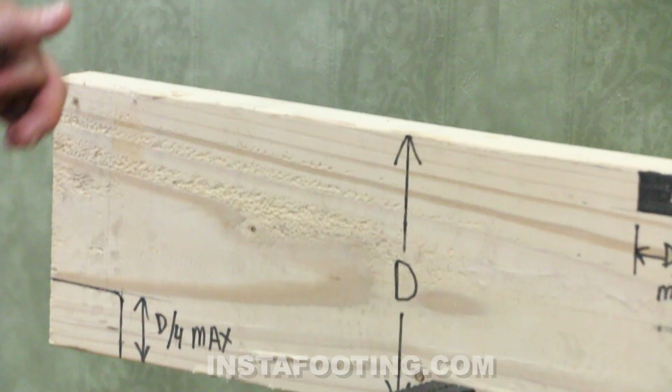Today we're going to talk about drilled or notched or damaged floor joists. We're going to start off by talking about what's allowed for drilling and notching, and then at the end of this video we'll show you a product that we have if your joist is notched or drilled beyond what's allowed. So we'll start off by showing you what's allowed in most building codes.

This here is a 2x8 piece of lumber. What's allowed for drilling and notching depends on the depth of the lumber. So we're not going to talk about a 2x4 piece of lumber because 2x4s aren't allowed to be used as floor joists. And we need to know the true depth. So a 2x6, for example, is not 6 inches deep, it's 5.5 inches deep. A 2x8 is 7.25 inches deep.

2x10 is 9.25 inches deep, and a 2x12 is 11.25 inches deep. So all the notching that you're allowed to do and drilling that you're allowed to do is based on the true depth of the floor joist. As far as end notching goes, you are allowed to notch up to 1/4 of the depth of the joist, and that's sometimes necessary to get it over top of a beam or a wall.

A notch at the top of the joist can be 1/6 of the depth and no more than 1/3 in length of the depth of the joist. In the center third of the joist, you're not allowed to have any notches. That's because the stress is the highest in the center of the joist. So you're not allowed to have any notches.

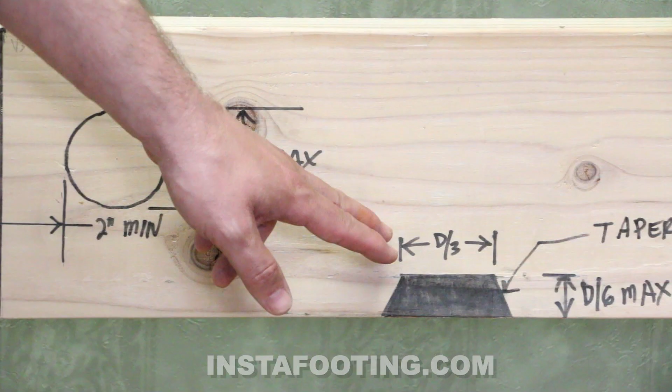A notch on the bottom of the joist can also be the same as the top, 1/6 the depth, and the length cannot be greater than 1/3 of the depth of the joist. If you are notching the bottom of the joist, it's best to taper your notches so you don't split the wood. You can pre-drill holes in the corner to make the corners round and cut a taper. That's a lot less stress on the wood.

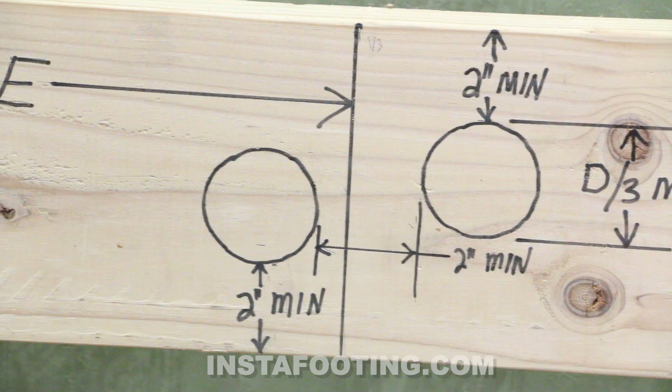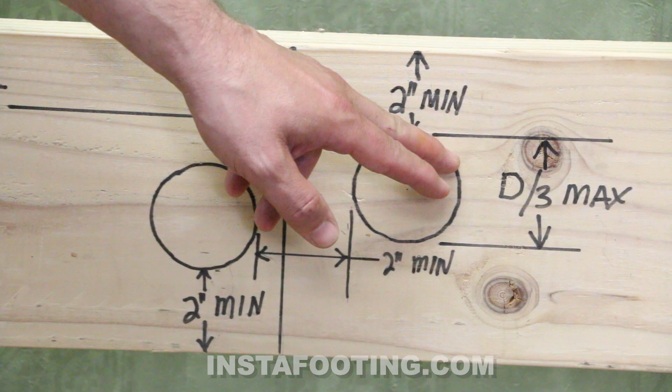Holes are allowed pretty much anywhere except for within 2 inches of the end of the joist. So you can have holes in the center third of the joist, but not notches. Holes must be located no closer than 2 inches from the top, and also no closer than 2 inches from the bottom. The spacing between holes cannot be less than 2 inches. The diameter of the hole cannot be larger than 1/3 of the depth of the joist.

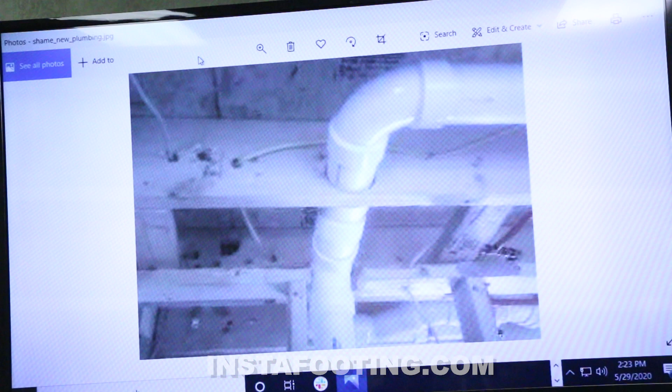So that is what's permitted by code. Now, if you do have notching or drilling greater than that, an engineer can always override the code, but you'd have to let them know because they'll have to do some calculations to see if it's acceptable. Just going to show you a couple examples of pictures of notching. You've probably seen that yourself. Obviously, notching or drilling holes is done for plumbing or ductwork or wiring or some other obstruction.

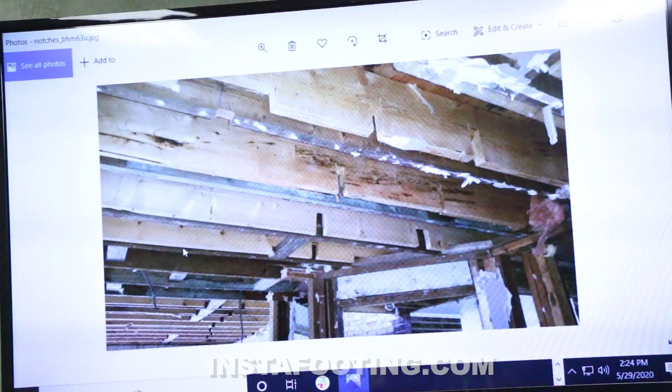This hole doesn't meet code for 2 reasons. First of all, it's less than 2 inches from the bottom of the joist, and second of all, the diameter of the hole appears to be greater than 1/3 of the depth of the joist. This next photograph here, these are notched up fairly bad. Again, the notches are greater than what's allowed by code, greater than 1/6 of the depth of the joist, and some of them may be located within the center third of the joist, and this particular one here is longer than what's allowed.

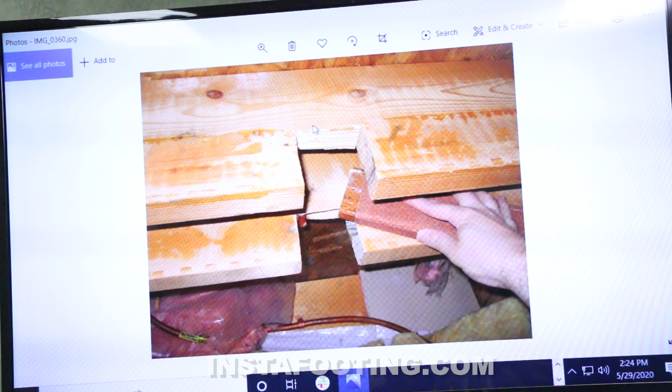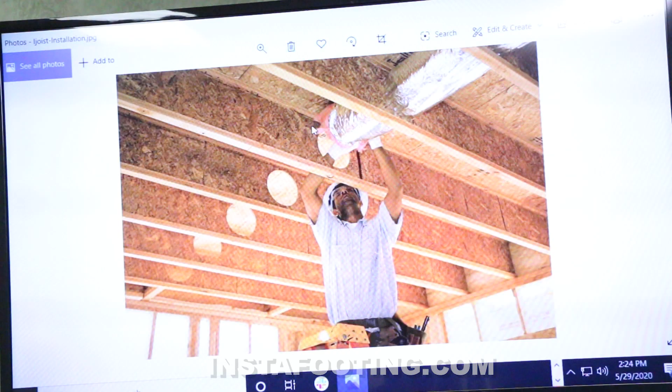And just another picture of a typical notch. And here's one notch that was made for plumbing that someone attempted to repair at the bottom. And I'm sure you've probably seen some joists yourself that have been notched out pretty bad. Here's a hole through a TJI joist that appears to be too large as well.

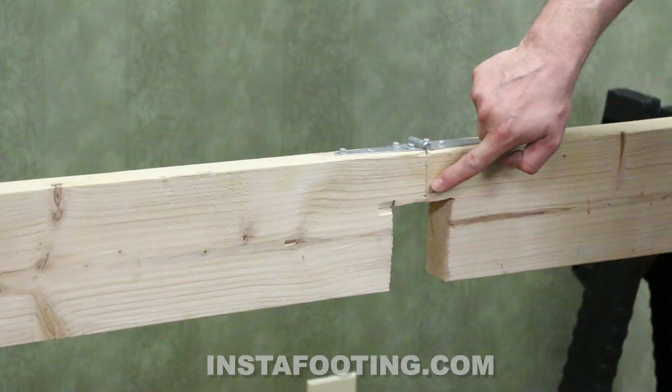Now I want to explain to you the behavior of a floor joist or a beam when it's loaded up with a load. I have a floor joist here that has a notch, and it's also been cut straight through and it's hinged on top. So as you apply a load to any joist, this is what happens. You develop tension in the bottom of the wood and compression at the top of the wood. So as you can see, if you cut out a notch, there's no material left there to absorb that tension, and it'll eventually split open and fail.

Mostly, if you see this in the field, there's really only one way of repairing this situation, and that's what's called a sister. They'll come alongside and they'll sister a floor joist alongside. The problem with that is, there's a few problems. First of all, usually there's plumbing and wiring going through the joist, and removing that plumbing and wiring and rerouting it is very expensive and time consuming and sometimes difficult to do.

Another problem is it's hard to get a sister in place because it's typically very long. You have to fit it over the foundation wall, you have to fit it over the beam, there's stuff in your way, so it's a very difficult thing to do.

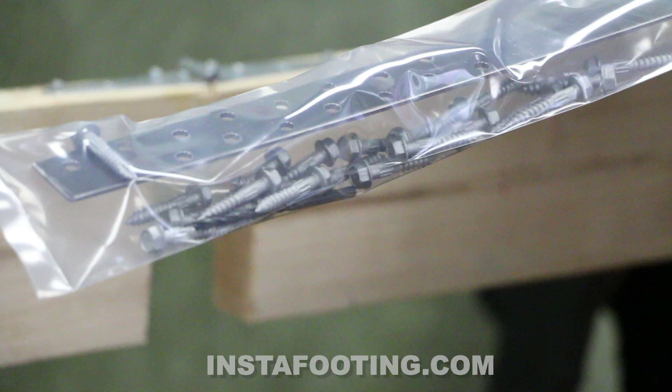We've come up with a product that alleviates that, allows you to leave your pipes and your plumbing in, but also restore the strength of your joist, and I'm going to demonstrate that for you now. What we've come up with, we call the joist repair kit. It's essentially a strap that's been specifically designed to attach to the bottom of the joist and absorb that tension force. It's been designed for the longest span joist that you can have per code under a full design load.

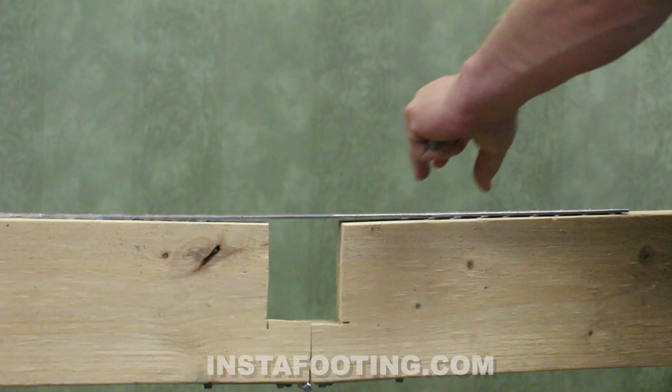The kit comes with the strap with the pre-drilled holes, a drill bit for you to drill pilot holes, all the screws you need, and the nut driver to install the screw. So I'm going to go ahead and install the strap at the bottom of the joist with just a couple of screws because I won't be loading this up fully at this time, just to show you the effectiveness of the strap. Now this strap takes 32 screws, 16 on each side, and that's necessary to restore the full strength of the joist. But for this demonstration, I'm only going to be putting in a couple on each side.

So you want to pre-drill the holes. I have the holes already pre-drilled. And you just want to snug it up. You do not want to split this wood. These are 1/4 inch structural screws. They're very strong. You notice I'm just snugging it up at the end, not overdoing it.

Now this joist is very strong, and that's only with 3 screws. So when you have all the screws in, this would be just as strong as the original joist, even for a 2x12 spanning 17.5 feet. If you stuck around for the rest of this video, I'm just going to finish up with some of the calculations to show how this works.

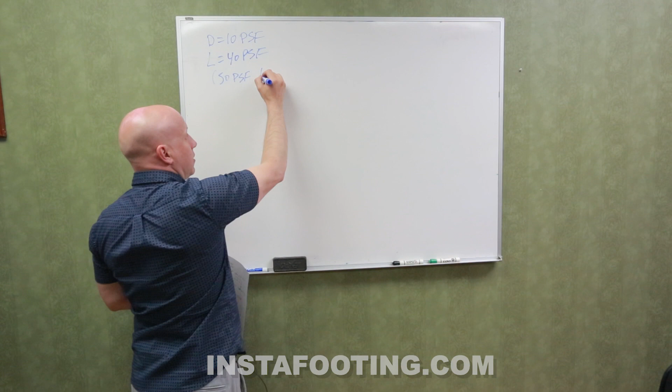So for a typical floor system, we designed for a dead load of 10 pounds per square foot. And if it's a first floor, a live load of 40 pounds per square foot. Typical joists are spaced at 16 inches on center. So we have to account for that. So 10 plus 40 is 50 pounds per square foot. But we have to multiply that by the joist spacing of 1.33 feet, which is 16 inches. So each floor joist would see 66.7 pounds per linear foot.

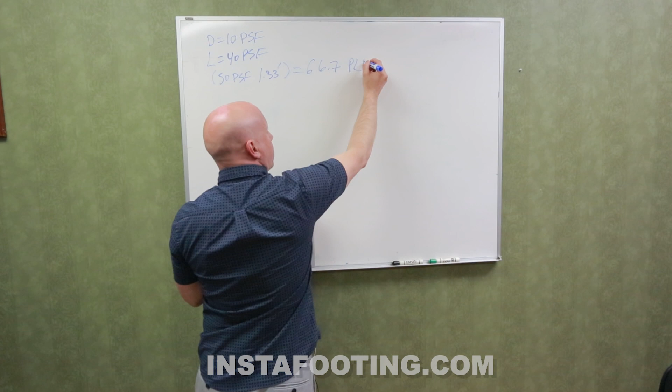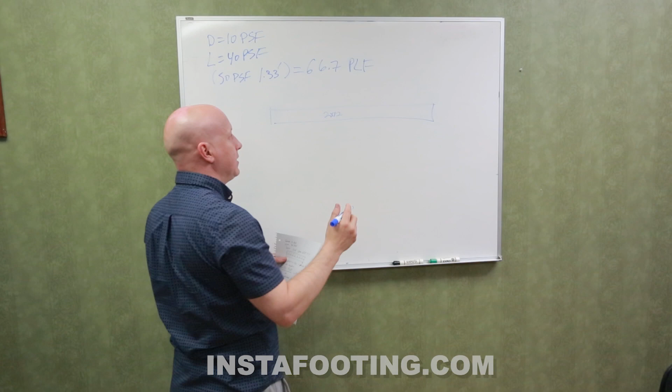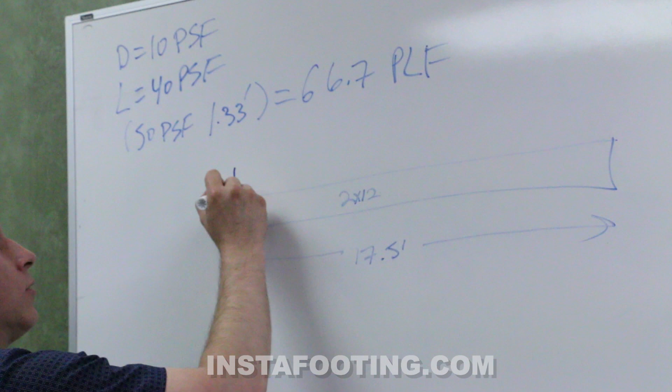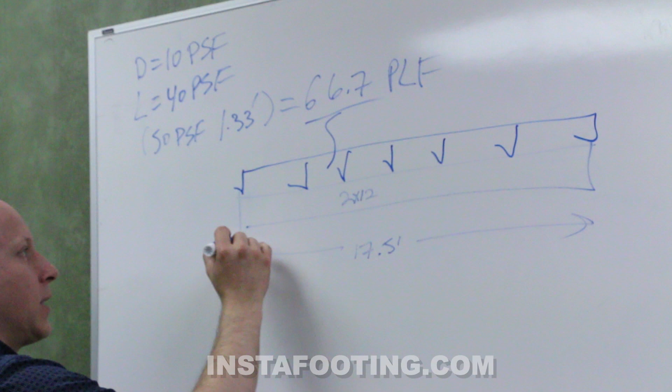So if I have a floor joist, let's say this is a 2x12. A 2x12 maximum span in most building codes is 17.5 feet. Put our floor loading on. Floor loading is our 66.7 pounds per linear foot. We have our reaction loads at both ends, which is basically 66.7 times 17.5 feet divided by 2. So each end sees 584 pounds.

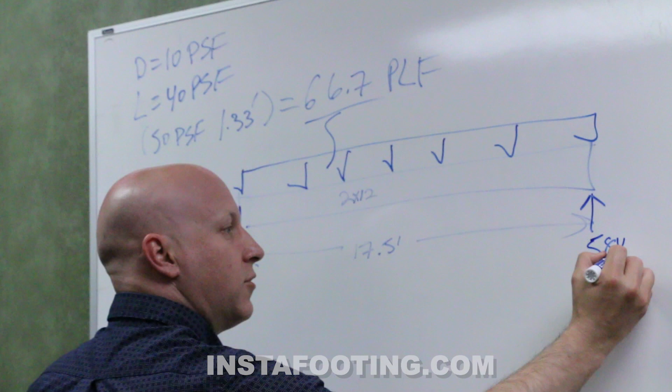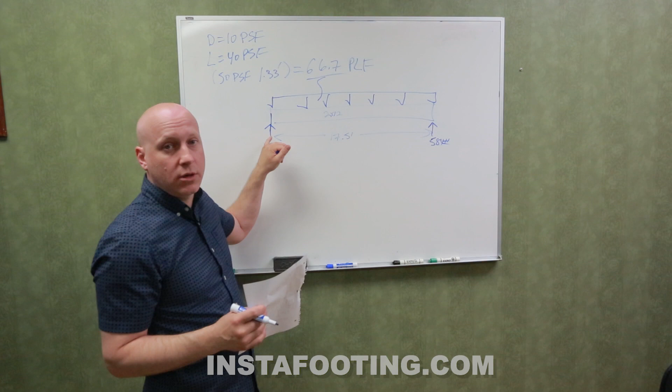Wood is designed for 4 things. Usually crushing, you don't want to crush the wood, deflection, shear stress, and bending stress. We're just going to look at the bending stress right now. We want to find out the maximum tensile force, which, as we showed with that demonstration, is at the center of the joist. So we need to find out how much tensile force we need to hold that joist together if it's notched. So I'm just going to take half of the joist, put my loading back on. We know that the end reaction is 584 pounds.

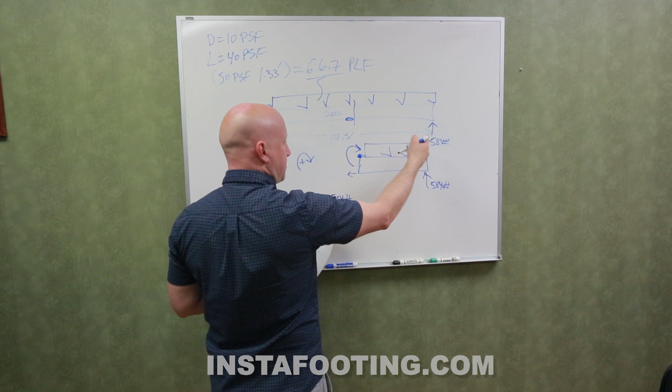We'll take the moment about this point here. This is our cut joist. We're cutting the joist right in half. So there's some kind of a tension here that's needed so this joist doesn't fail. So what we're going to do is take the moment about this point here. So we have 584 pounds. Let's call this positive direction. So that wants to spin it this way. So we have 584 pounds times this length, which is 17.5 over 2, which is 8.75 feet.

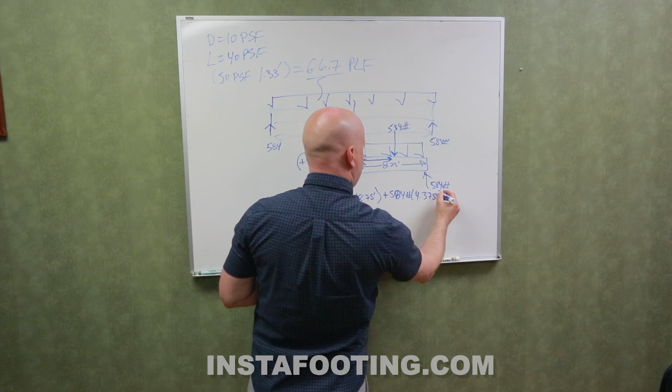Then we have the moment caused by the loading on half of that, which also happens to be 584 pounds. And that would be multiplied by this distance here. So we have 584 pounds times that distance, which is 4.375 feet, I believe. I think that's a little off, but it's close enough for now.

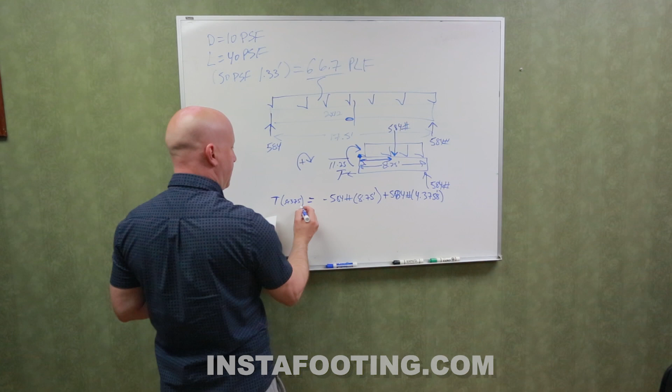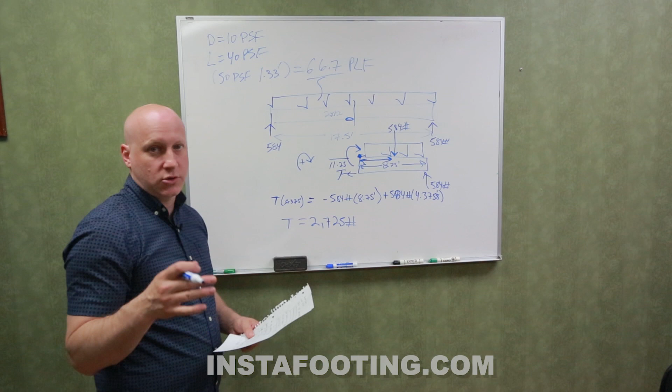And then we have the tension that has to equal. And this is a 2x12 joist, so that tension force is acting over a distance of 11.25 inches, which is 0.9375 feet. So if we solve for T, we get T equals 2,725 pounds. So if we have a notched joist or a joist that's cut all the way through, in order for that joist not to fail, we need to restore a tension of 2,725 pounds. And that's exactly what that strap's designed to do.

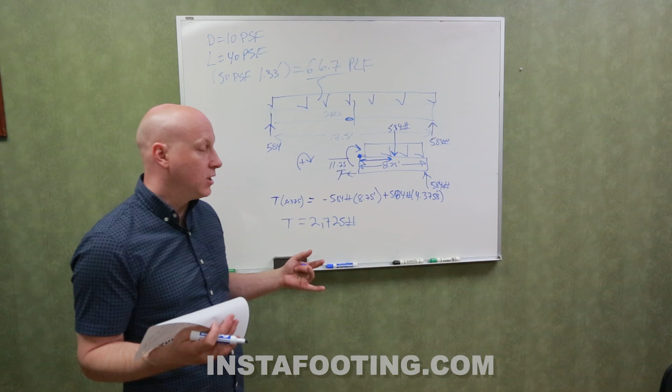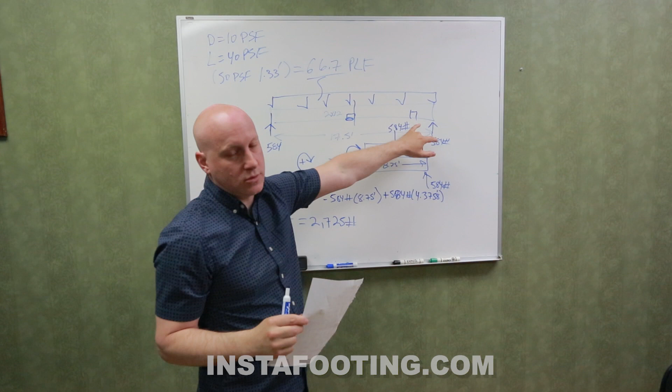It has a thickness to do that, and that's why it requires so many screws, because that's quite a bit of load. Now if you have a shorter joist or one that's not loaded as much, that strap won't see nearly as much. Or if that notch, instead of being in the middle, were located somewhere at the end, again, it would not see that much, as the bending stress goes to 0 as you get closer to the ends, and it's maximum in the middle. So thank you for watching this video.